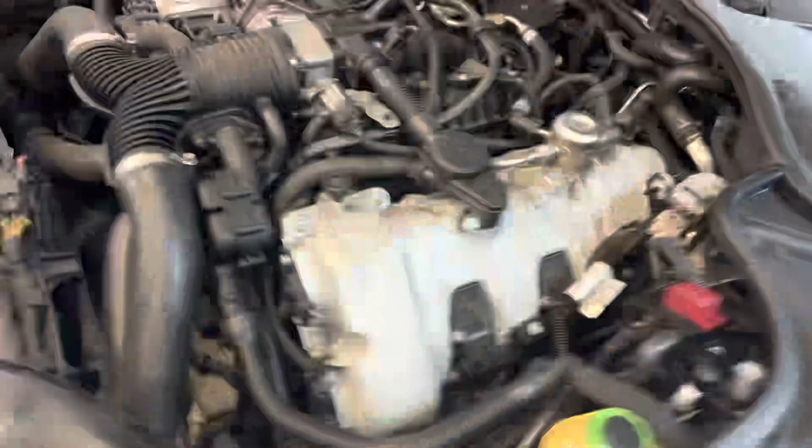You have to scan the fault codes, clear everything one more time, put the covers back, put these covers back. There's 3 bolts. So when you lower the car for the first time, it's going to be really high. It'll be about like that high off the wheel. And then when you start it, if you have no faults and everything's working how it should, it'll lower itself down to normal ride height.

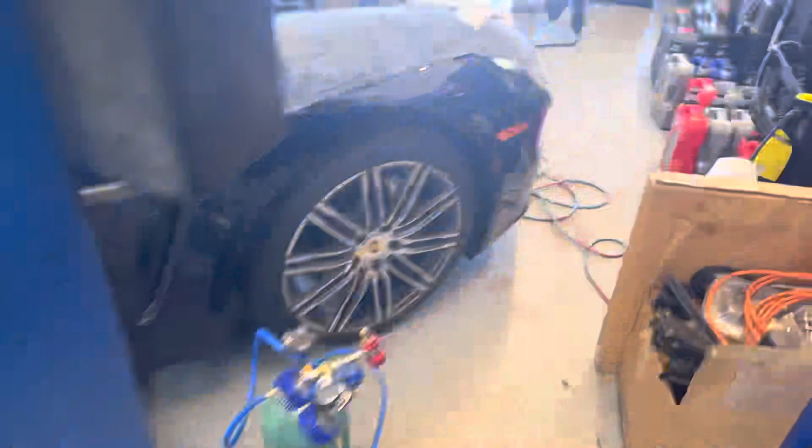So now you can put back the trim panels. Check your level on all sides. Go for a test drive. Release the pressure from your accumulator and regulators. And that's it.

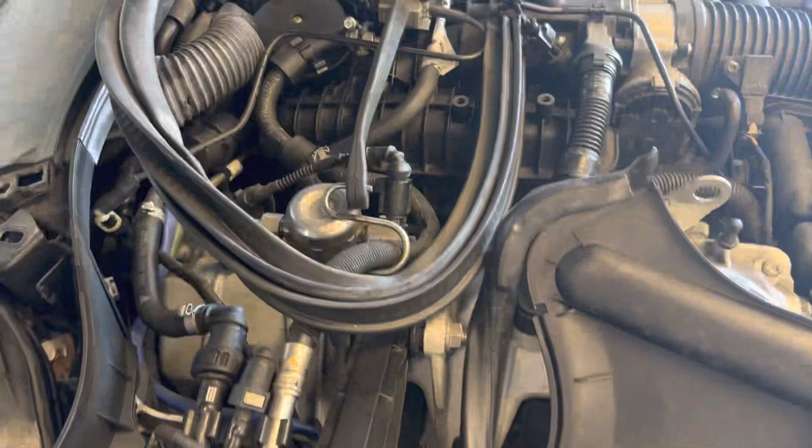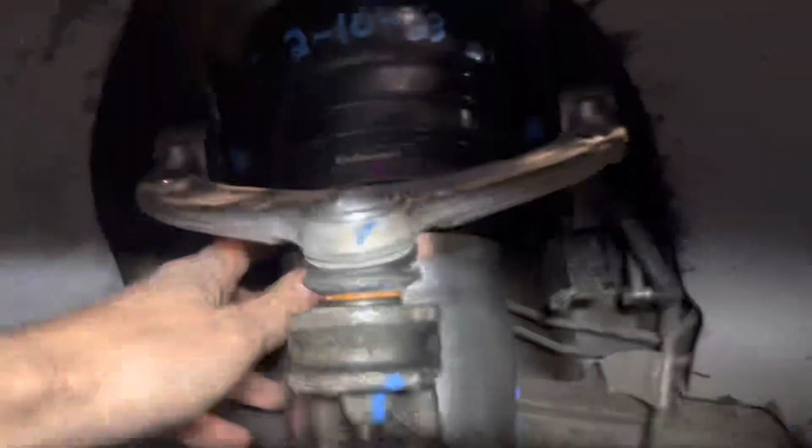By the way, this fuel line leaking, if you replace the whole line from there all the way down. And you can also feel it here. You can feel it get hot and it will rise a little bit. So right now it's pretty firm, which means we're getting air pumped into this front right now.

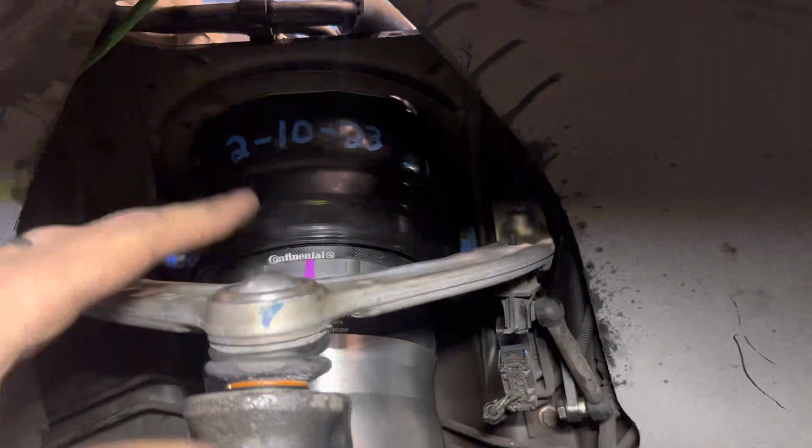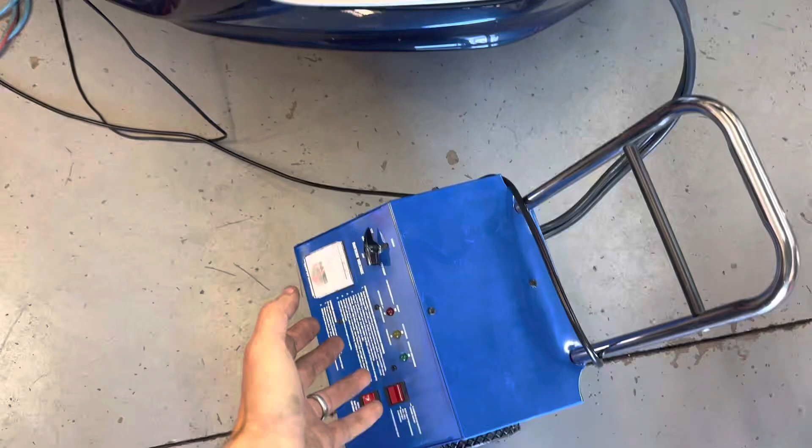Okay, so essentially what you're doing is you're filling from the green line into the valve block, into the compressor, and then from the compressor you disconnect the line, connect it to the strut, and then it fills from the tank to the front strut. You have to do it with a scan tool, and I have to connect it to a charger, at least 13 volts you need.

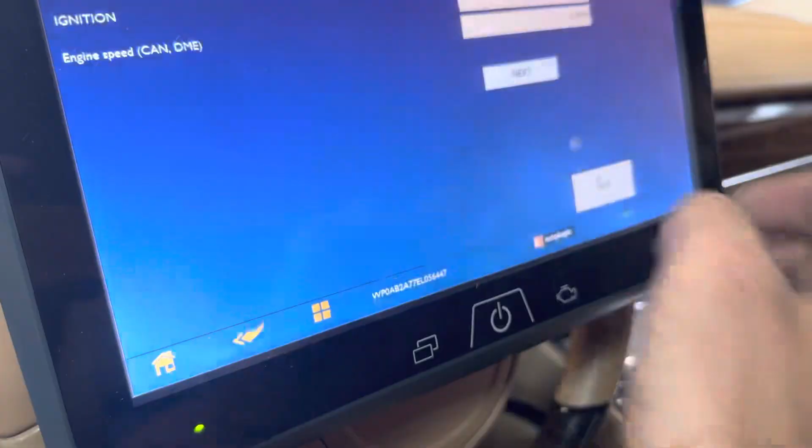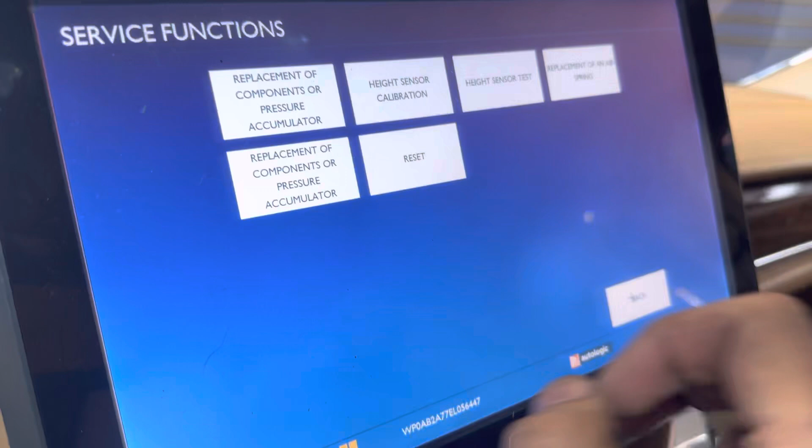And you see, it says successful. Okay, so now that's it, you're done. So now put the car down, we're gonna clear the faults, we're gonna go back, see 13.3 volts, 13.2, go back, see, you're gonna go to replacement of components or pressure accumulator. Go back, fault read, no fault stored.

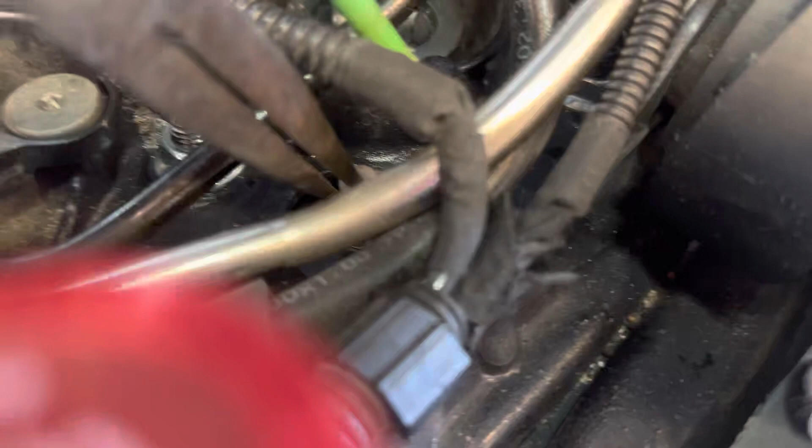That's what we want. Okay, so only at this point you can put the car on the ground. So it has to be in the air while you're doing this procedure. You cannot set the car on the ground. So then you're gonna remove that white pin from the new strut assembly, okay?

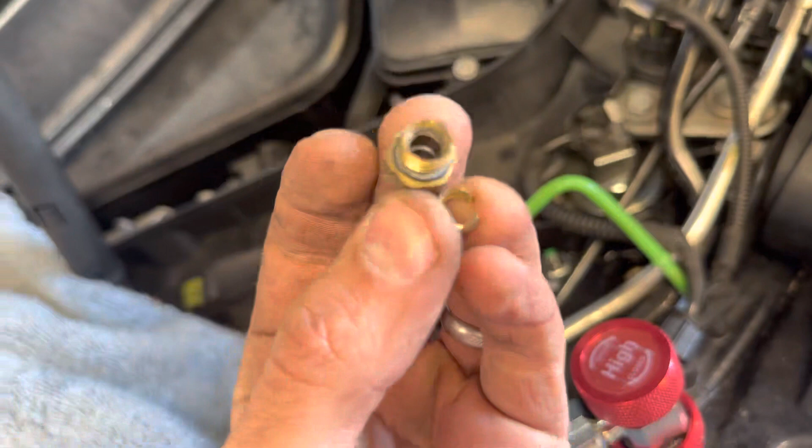Then you're gonna remove the old valve like that, very careful. Then you're gonna clean off this line with brake clean, so it's clean before you insert it. And then it gets inserted right into there. You'll hear a click. Okay, so carefully. There you go. Hear that little click? See how it's stuck in there?

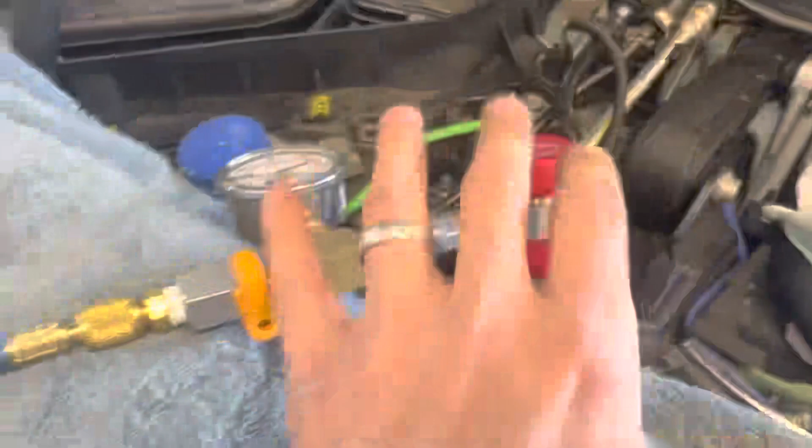Okay, so now this is called the second stage to filling it. So right now the tank in the car in the back is full. And now, see, it says remove nitrogen filling system and reconnect front right damper correctly. Okay, we just did that. So hit OK.

Fill front right damper status. So see, it says start. See, right there. Hit start. It says please wait, and it'll either be successful or unsuccessful. So now it's venting from the tank in the back of the car to the front strut.

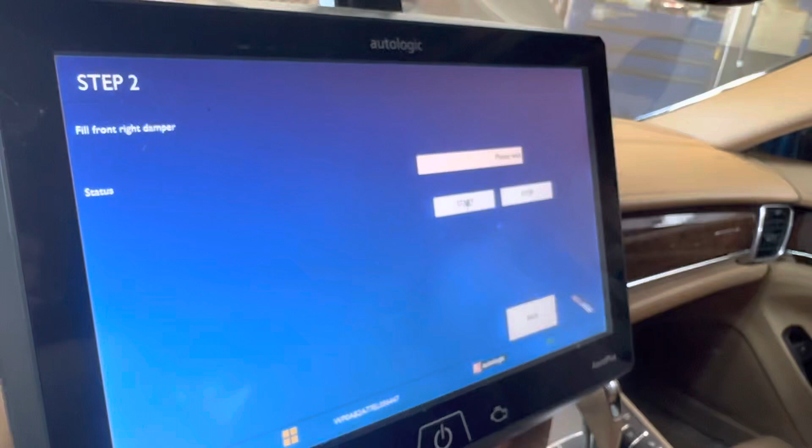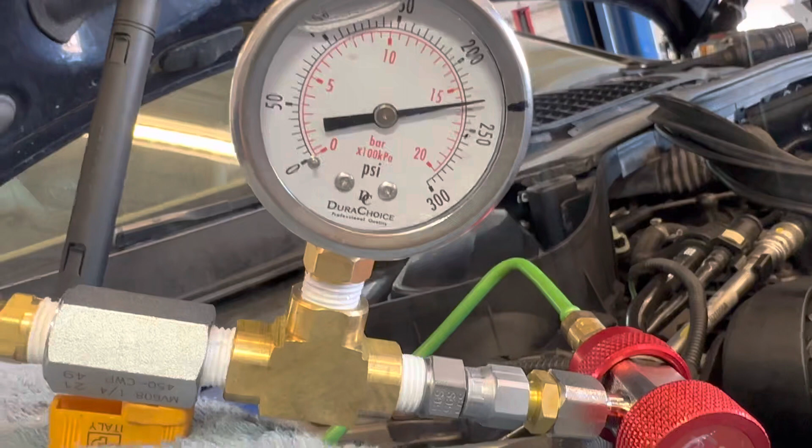So now it's filling the system. You'll notice the gauge jumping a little bit. See, it's filling it and checking it, filling it and checking it. This will be at 17 bar or 246 psi. There you go. So 16 bar minimum, 17's maximum.

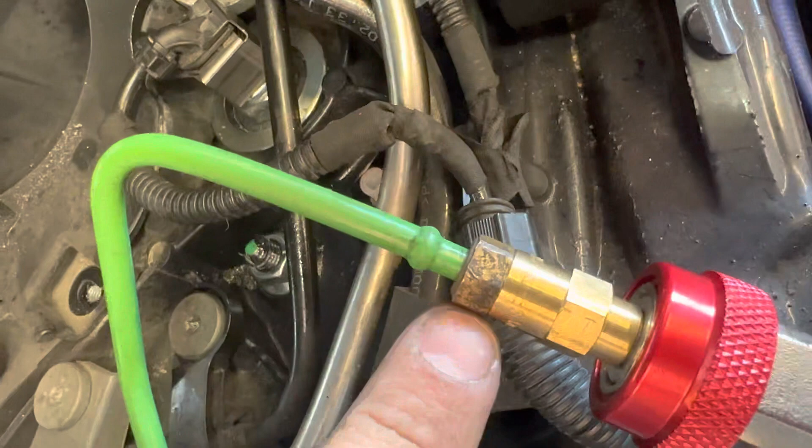So right now it's filling the system. That's open all the way. This valve is open as well. This connects with the old attachment. They came out of the old strut on the airline, and that new one we're gonna use. It's already in the strut.

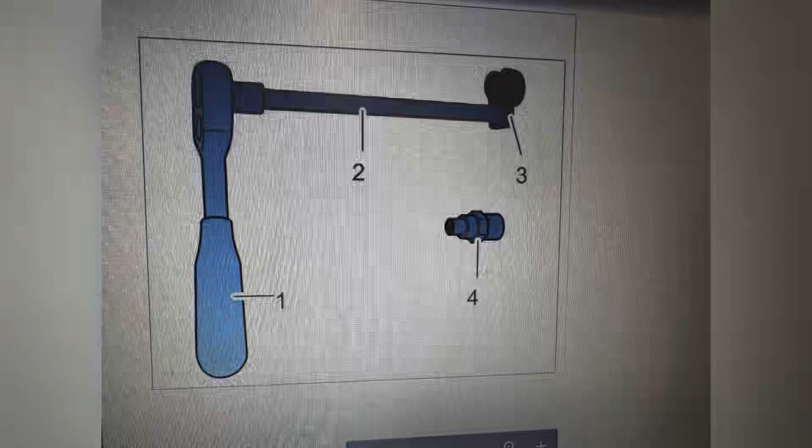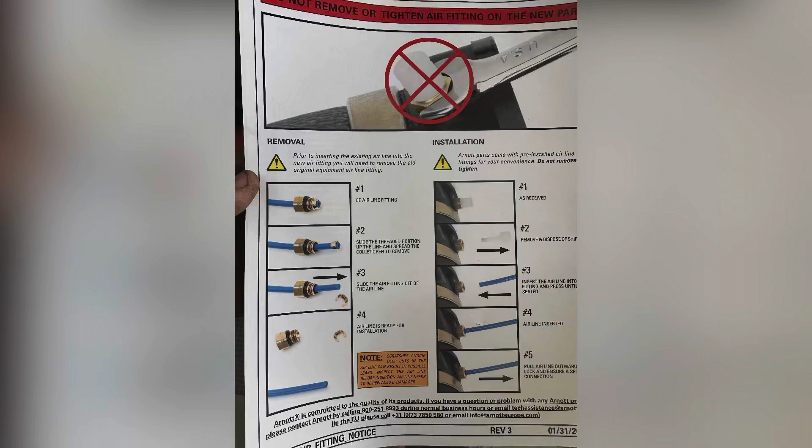So up here, as you can see, here's your airline. You're gonna replace that right there. They provide you new fittings. See, there's the new fitting already installed. That white clip comes out. By the way, when you fill it with nitrogen, you fill it through this green line. That already comes pre-tightened. We don't have the rebuild kit. So it's pretty simple, straightforward.

Here's your little connector with your metal clip that just slides out. See how I got this? A bungee, just holding it out of the way. They want you to remove all of this, the windshield wipers and everything. You know, no need to do that.

On the other side, I just use a little puck. You see that little puck right there? Just to hold it out of the way. So you can have plenty of access in this hole to tighten it. Here's that one right there, and here's this one right here, right? You got to do less work, not more. In the instructions, they want you to remove this whole brace that goes all the way from here to the other side.

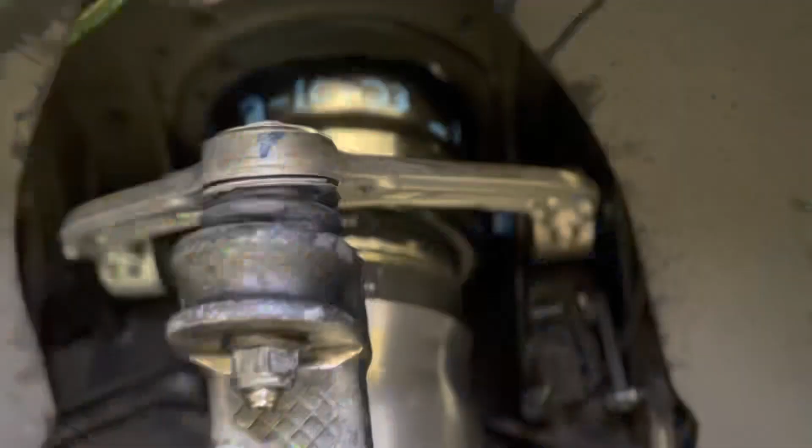There's no need to do that. So another important thing, guys, when you tighten those bolts there, this upper arm has to be at roughly this height right here. You don't want to tighten them all the way up or all the way down, because you don't want to put too much strain on those bushings. You can actually rupture them if you pull on this too hard.

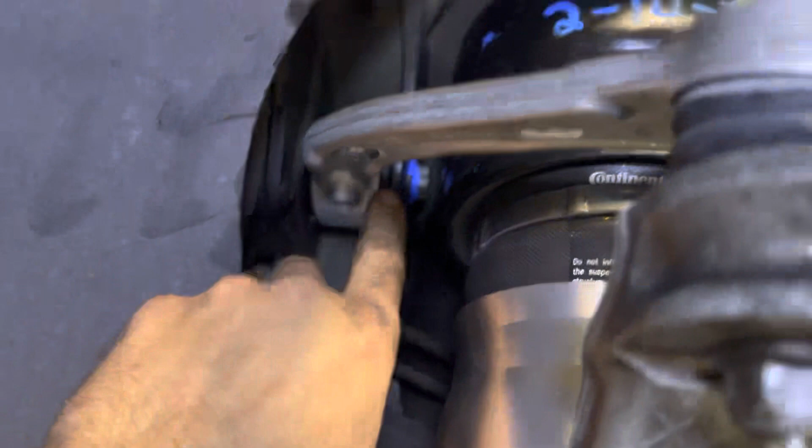So you're going to want to tighten those with the strut out, but you're going to want to tighten it in roughly this position. And when you put the strut in, just push it up, put the strut in, and then it'll come down on its own. So it's very important that you tighten these in roughly this position here.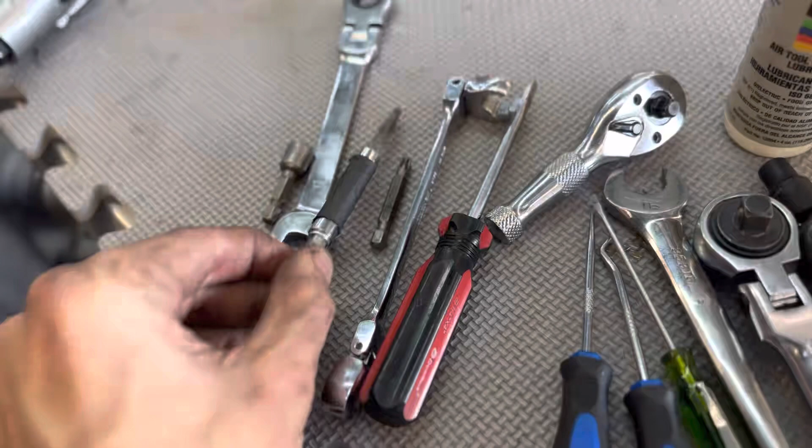All right, so for you guys doing this at home, get some sort of lube. You're gonna need a 12 millimeter, an 8 millimeter, a T20, T25 with extension, a T30, a 10 millimeter, flathead, small ratchet, a couple picks, screwdriver, 16 millimeter long, a couple ratchets, an E10. Let me show you what else.

If you have air tools, they make your life a little bit easier, with extension, and 16 millimeter, 18 millimeter, a 24 millimeter on a long one that's small like this, doesn't take up a lot of space, a T40 for the upper control arm bolt,

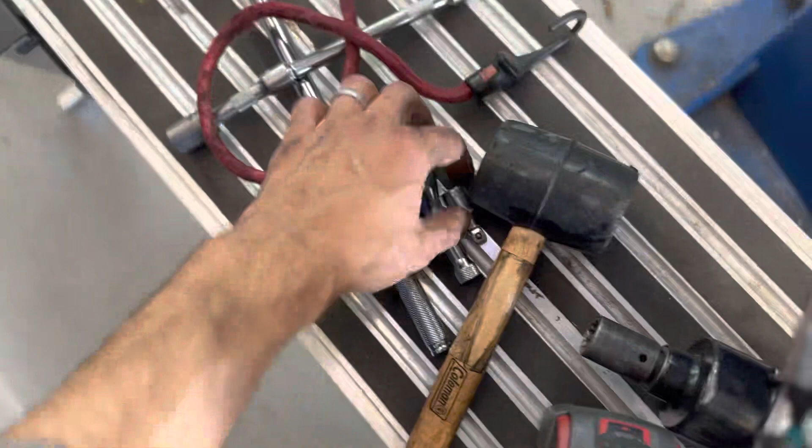small extension, small ratchet, a couple extensions like this with a 15 millimeter and a long 3/8, a couple bungees as well, a mallet, 10 millimeter on an impact, an 18 millimeter on impact, some sort of lubricating oil to loosen up everything. So I'm just going to explain to you really quickly here.

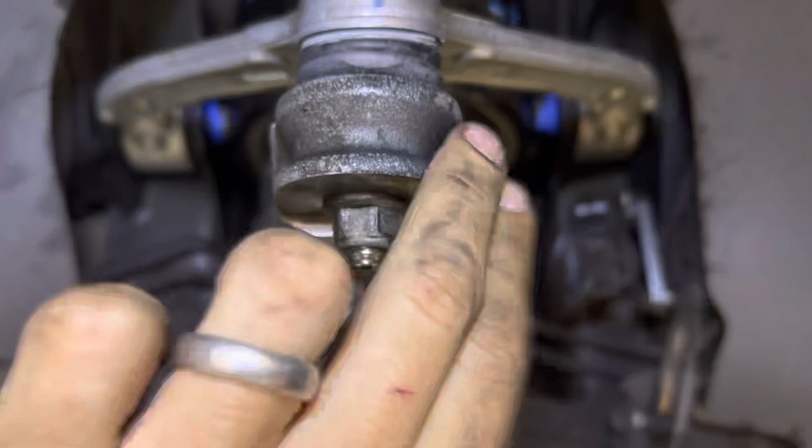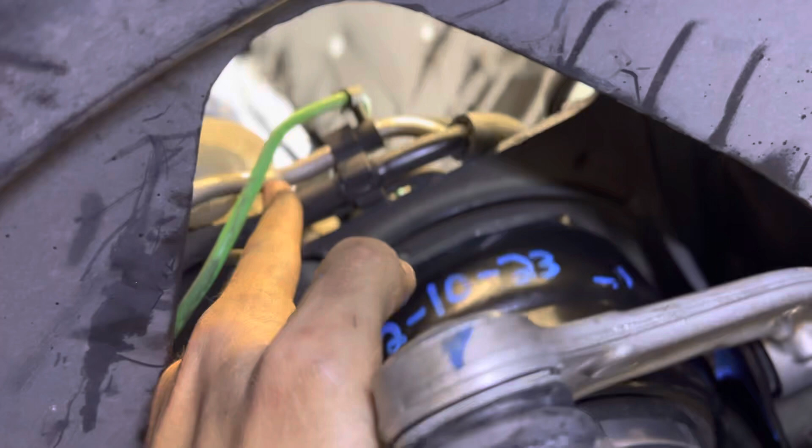When you start, loosen this bolt, break this apart, just tap it lightly here. This will come off. Be very careful not to damage this because it's aluminum. Then you're going to put this up, take a zip tie on this side, zip tie it to that line, the AC line, or I think this is a fuel line. Zip tie this so it's out of your way.

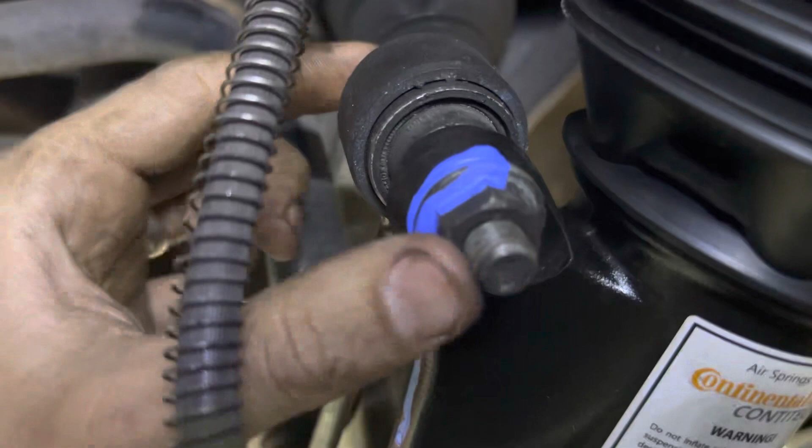Then you're going to remove the sway bar link. It's a bolt. You can use an impact, hold it from the bottom, from the back. Remove the sway bar link, keep the tie rod in place, don't touch it. Remove this bolt here. I'll show you with that 24 mil. And just look at all the pictures very carefully that I'm making for you. It's pretty self-explanatory. This bolt slides out.

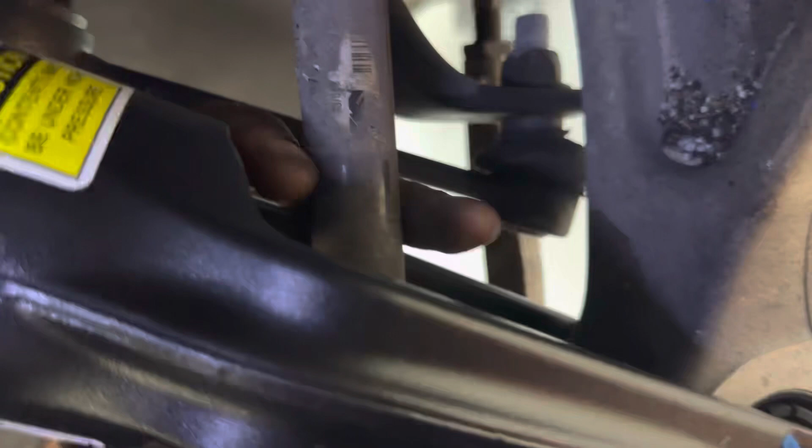Then what you're gonna do to pull the old shock out, you're going to angle it. It's gonna go like this, out this way. So see how much space there is here? There's enough space here that it can just drop down enough to clear this axle. If you have the spring type, it's a little bit more difficult, but with the air, it's pretty simple. You'll just carry it out this way.

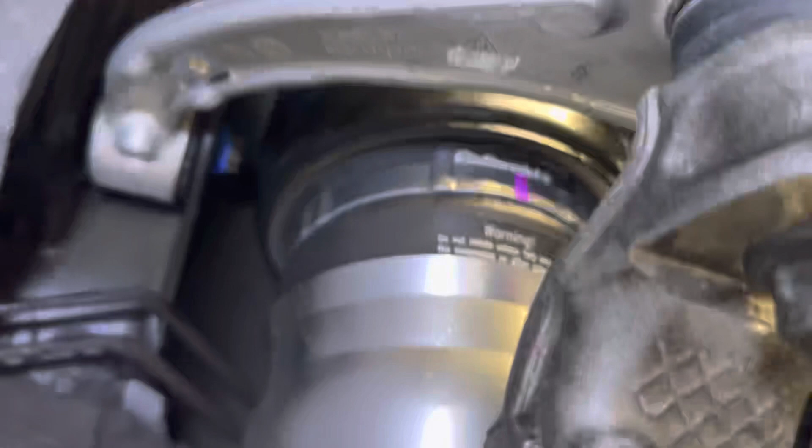What else? Then you can actually get to these bolts. I'll show you from the top. You don't have to disassemble a bunch of stuff. Just hold the other side with a 16 mil and then undo that bolt and this bolt. It's a perfect time to replace your upper because you have to remove the air strut anyway. Okay, so pretty simple job.

What you are gonna need though is some sort of jack. If you're doing this on the ground, it's gonna be a little bit more difficult, but you need a jack because you're gonna put the jack underneath the lower control arm here. So what you're gonna do is slowly raise it until you get those 3 holes up there to line up. And then you can tighten the top. I'll show you in a second. And then what you're gonna do is take a piece of wood and put it underneath your sway bar to jack this up to get this to line up to here.

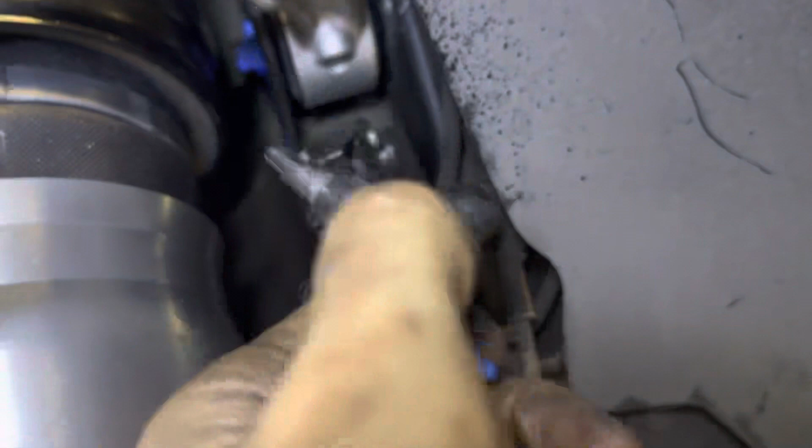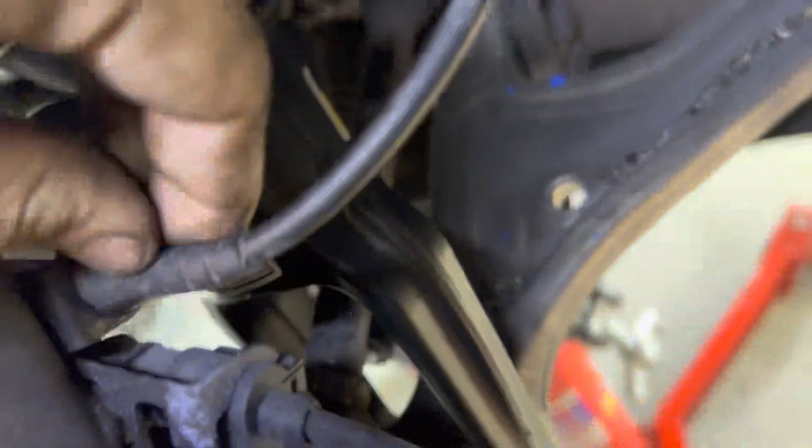Okay, so pretty simple, but oh, one more thing I forgot. The first thing actually, your level sensor, it just pops out. I'm actually going to replace this because they're so old and brittle that it breaks. Those little clips break, so you're going to have to replace that bracket. And you're going to want to undo this sensor line and that. And then you're going to want to undo these two 10 millimeters for your brake line.

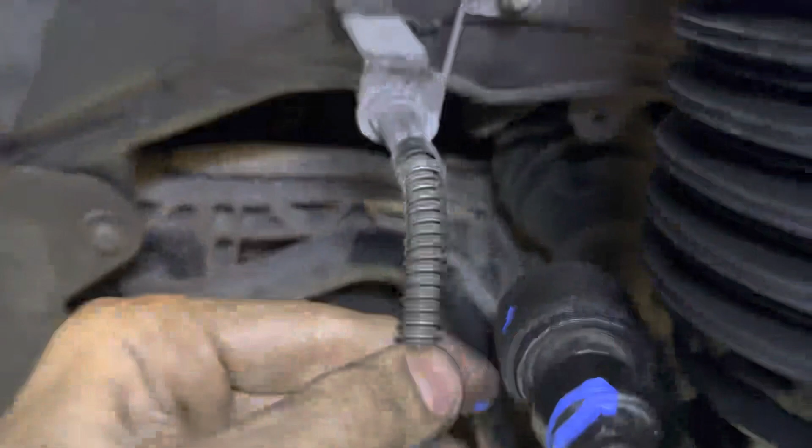Just don't pull on it too hard. Have a bungee holding it here so that if the shaft pops out a little bit, that's okay. You can just get it back in, you'll feel it. You just don't want to put too much tension on this line. So that's pretty much it, guys. Pretty simple. There's a new Arnott shock.